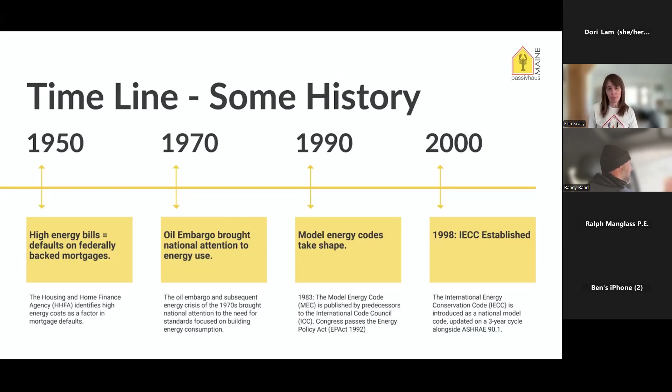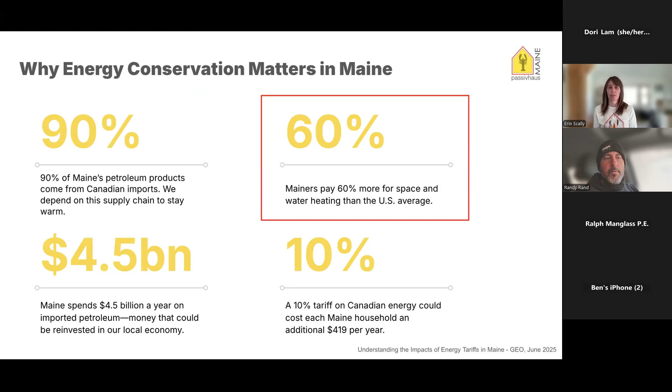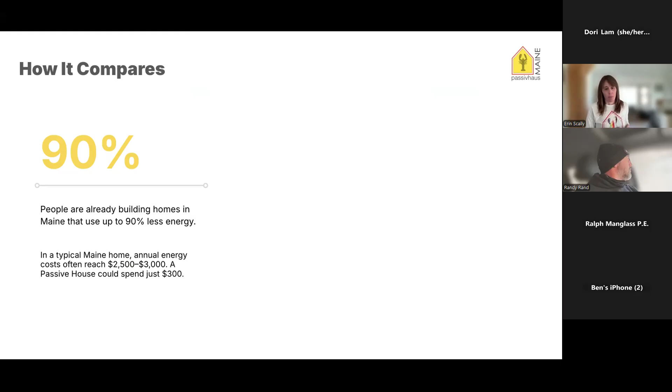Our name is Passive House Maine, though I'm not trying to sell anybody on being a certified passive house builder. To put it into perspective, there are already people in Maine, like Randy and Builders Internet Network, building houses that use 90% less energy than a house built before the 1970s, and about 75% less energy than a home built to the current 2021 standards. Financially, if Mainers on average spend about $3,000 a year on energy, there are builders in Maine already achieving about a $300 annual energy cost.

If we look at how the passive house model compares to the 2021 IECC, we see they're actually starting to overlap, especially with roof insulation—it's R60 in the 2021 IECC, and passive house is pretty close to that. One key difference is air tightness. Passive house focuses on airtight construction with 0.6 air changes per hour, whereas the 2021 requirement is 3 air changes per hour.

When we bring in performance builders to talk during our in-person code trainings, it's really not so different—it's just attention to detail and transitions, which we'll cover later. Cost always comes up. How much more does it cost to build to 2021 IECC compared to 2015? I don't have that data today, but going from 2021 IECC all the way to passive is about a 10% premium on new construction. That percentage gets much less for multifamily or bigger builds—about a 2.4% premium to go from 2021 IECC to fully passive in a large multifamily project.

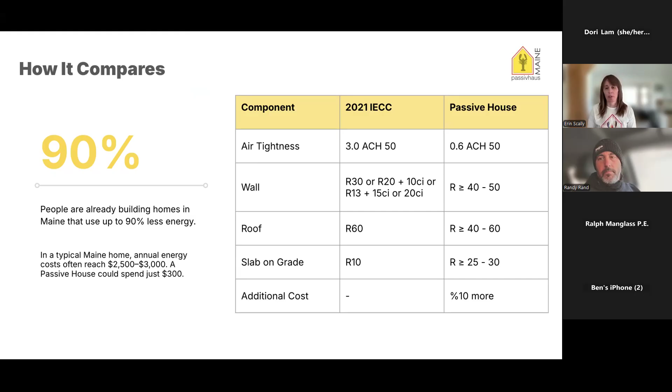We also bring in high performance builders because we already know the trajectory of codes in the US. This is a graph from the Department of Energy showing where we are now—that might be 2021—but by 2024, we'll already have this reduction in energy. By 2030, in the far right corner, the goal is a zero energy building.

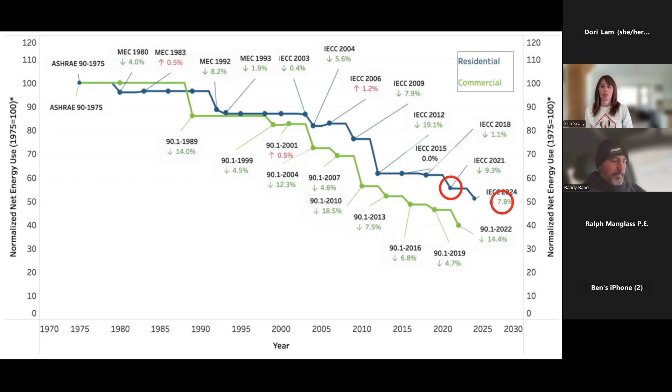So we're here today to talk about meeting Maine's energy code in climate zone 6 and 7. Most of Maine is in climate zone 6, and the county up north is in climate zone 7. Climate zones become important because as we get into code, it starts referencing climate zones.

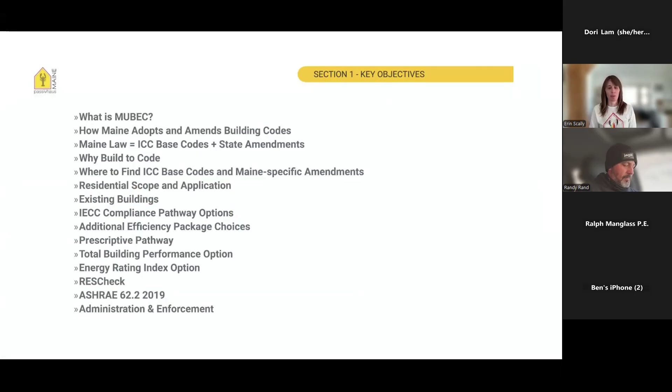So we have a bunch of objectives to cover today. This feels like a test for me. We've been reducing the hours spent on this presentation from an all-day code training, then a 3-hour code training, and now I'm going to try to get through as much as I can in an hour. It's kind of a fun time for me right now.

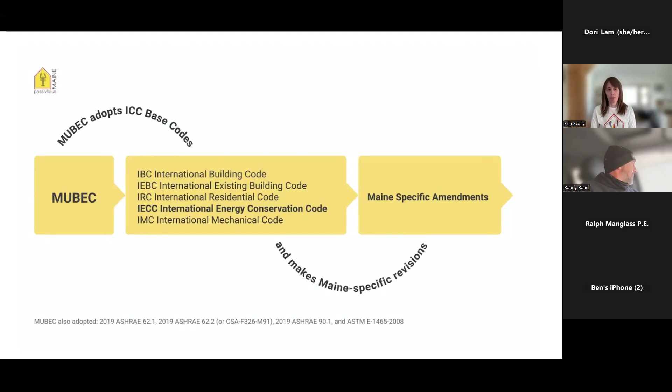All right, let's jump in. What is MUBEC? MUBEC is the Maine Uniform Building and Energy Code. MUBEC adopts our ICC base codes, which includes the 2021 IECC—the Energy Conservation Code—along with the IRC, which is the residential code, and other safety and mechanical codes. Not only do they adopt those base codes, but they also make Maine-specific revisions. So it's our ICC base codes plus our Maine-specific amendments that equal law.

This is actually a sticking point for people understanding who needs to build to code. The answer is that everybody in Maine needs to build to the 2021 IECC standards—MUBEC is law everywhere in Maine. The only difference is that municipalities with 4,000 people or less don't need to hire a code enforcement officer to enforce the codes. Enforcement is always the elephant in the room, but everybody needs to build to the 2021 IECC base codes.

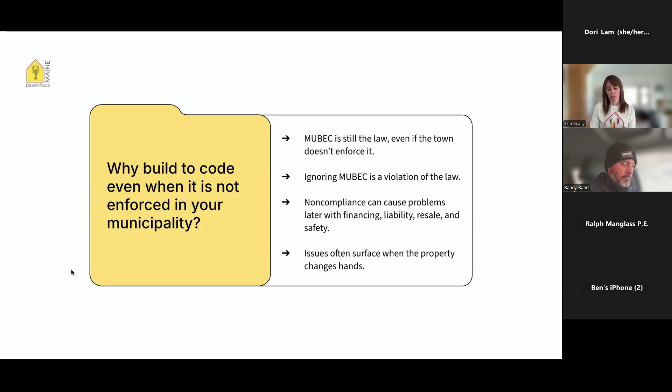So if you're in a municipality with 4,000 or less, why build to code when it's not enforced? Because MUBEC is law—if you're not building to these standards, you're violating the law. Really, non-compliance becomes an issue with resale. Down the road, you'll see the problems when the property changes hands.

So we now know that MUBEC adopts our base codes and then makes Maine-specific amendments. Where do we find these things? The ICC base codes can be accessed for free on the ICC website—I have a QR code here for you. The Maine-specific amendments can currently be found on the Maine State Fire Marshal's website, though I believe that's changing soon. Randy, do you remember the name of the website it's moving to?

I don't know exactly where they'll have it within the website, but I'm sure they'll keep both a link active at the Maine State Fire Marshal's site and redirect people as they look for it.

Just to reiterate, on your left is your 2021 IECC codebook, which is available in online PDF format. It's the IECC base codes plus the Maine specific amendments, found on the State Fire Marshal's website. You download Chapter 6, the International Energy Conservation Code, as a PDF, and cross-reference that with your IECC book.

When we're in person, we like to hold up our code book, which is about 302 pages, and it can feel like a daunting task to understand what the IECC is and how to read it. But when we break it down to the residential provisions, there's only actually 24 pages that this entire presentation is based on. The rest of that book is commercial.

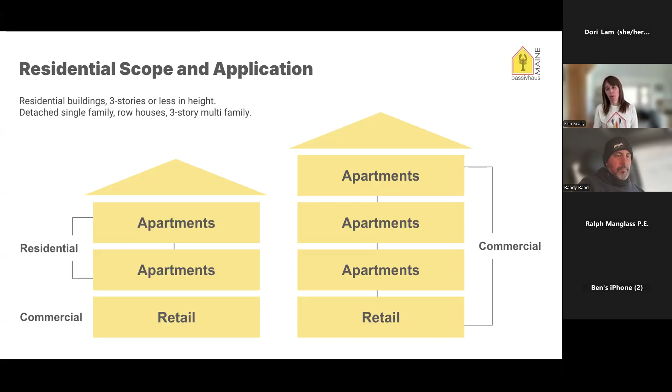It's important to note that as long as your building is 3 stories or less, even if it's mixed use with a couple levels of apartments and one level of retail, the apartments would fall under residential and the retail under commercial. But if you bump that same structure up to 4 stories, with 3 stories of apartments and 1 story of retail, that would all fall under the commercial provisions of the IECC, including the apartments.

I feel like I always talk about this in the context of new construction, but there are guidelines for existing buildings too, covering alterations, repairs, additions, and change of occupancy. Largely, it's only the parts of the building that are changed that must comply with the 2021 IECC.

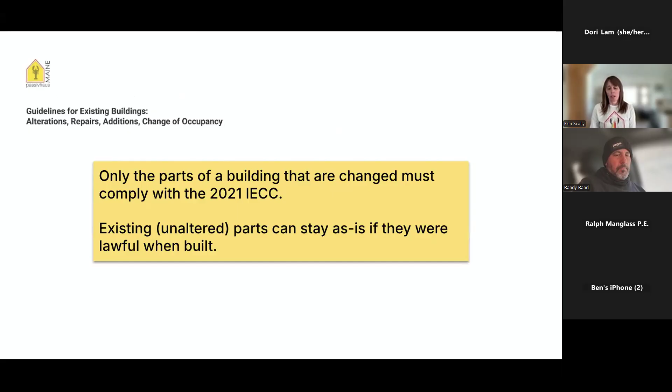To figure out what and how much needs to comply, there's a pretty simple chart you can follow. You decide what your scope of work is. Say you're changing your basement from a previously unconditioned space to a conditioned space—you would actually need that whole space to meet the 2021 IECC. But if you're doing an alteration, only the parts that you change need to be brought up to the current standard.

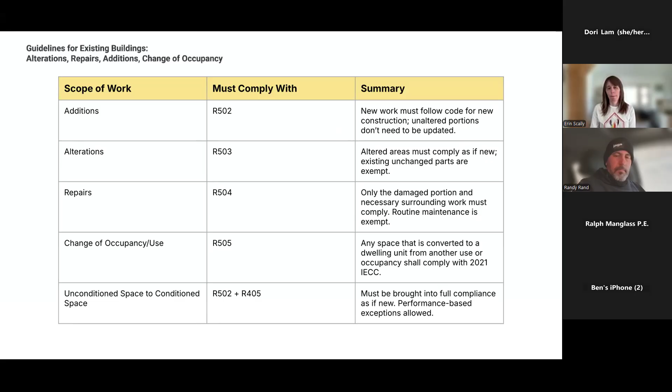Now we're getting into the meat of it. We know where to find what MUBEC adopts and where to find our resources, but now how do we comply with the code? There are essentially 3 compliance options outlined in the IECC, plus MUBEC also adopted compliance pathways like the DOE Zero Energy Ready Homes, PHIUS, or Passive House Certification. If you have any of those, you can actually bypass reading through and following the specifications of the IECC.

But if you are going to just work within the book itself, you have 3 options. You have the prescriptive compliance option, which we're actually going to spend the most time on today because across the board, it's the option most Maine builders pick. There's also a total building performance option and an energy rating index option.

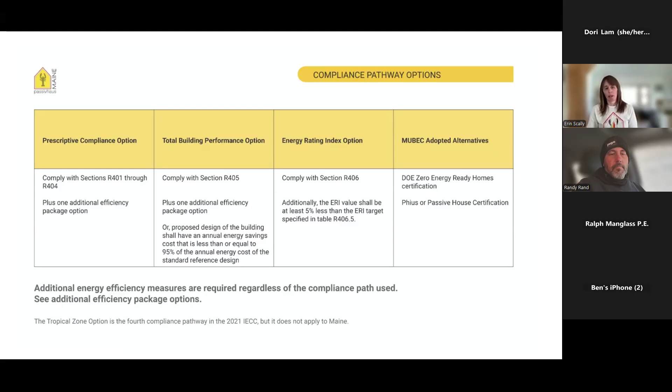So before you even dive into the codes and what insulation values you have to meet, you need to pick how you want to approach your build—which compliance pathway you want to pick. Once you know that, you look at the sections that reference, let's say, the prescriptive compliance option. It will tell you which sections you need to meet, and you can pretty much skip everything else. We're going to stick mostly with the prescriptive compliance option today because it is the one most widely used here in Maine.

But before I move into the prescriptive compliance option, it's important to note that no matter which compliance pathway you choose, you also need to pick one additional energy efficiency measure, regardless of your compliance path.

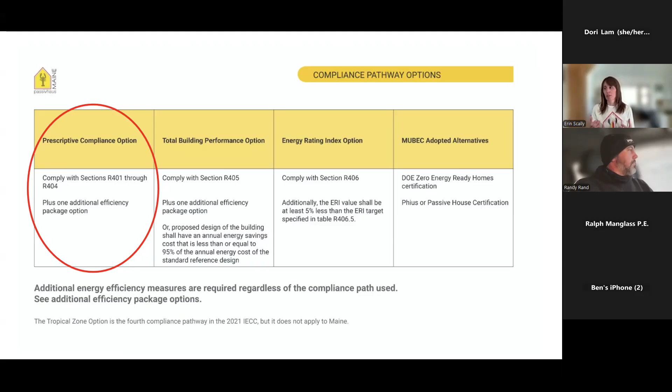So these additional energy efficiency package options are listed in section R408. I have them here written out. Randy, do you know which package option would be easiest to meet, or one that builders are saying they're going to likely use?

Honestly, most of them, I think we wind up hitting and we're not realizing it. If you dig into any of them, the HVAC ones, reducing water heating, a lot of those are starting to be met just with efficiencies in standard equipment that people are meeting. I don't think any of these are really difficult or impossible to overcome.

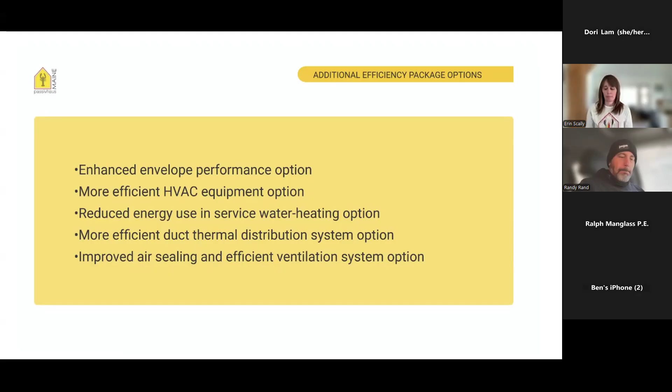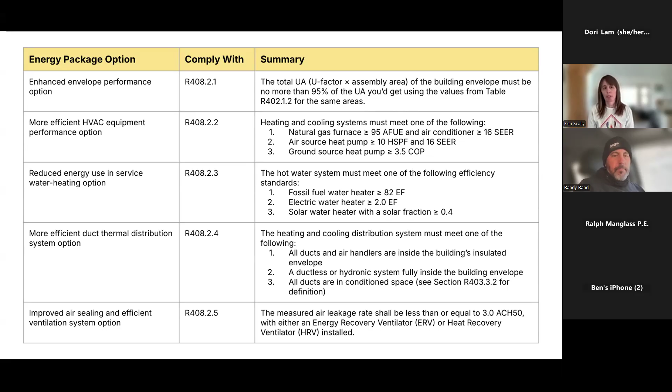This is just a chart on what these energy package options are, what section you can find them under, and what the minimum requirements are. I'll be sending out a PDF after the presentation where some of these resources will be included. So we don't have to go through it step by step, but I want to bring awareness that you have to pick your compliance option, and no matter which compliance option you pick, you have to add an energy package option.

All right, so now we're getting into that first compliance pathway, the prescriptive compliance option. It gets a little bit confusing because we have essentially three compliance pathways we can choose, but within the prescriptive compliance option, you actually have three different ways you can show compliance within that one pathway.

For the most part, builders in Maine are going to choose the minimum R value table pathway. They'll be in prescriptive, look at the chart listed in R402, and meet those minimum R value requirements. Two other ways to show compliance within the prescriptive pathway are by meeting the maximum U factors listed in another table, or meeting the total UA alternative requirements listed elsewhere in the code. So we're going to walk through these three ways to show compliance within the prescriptive option.

The first and most widely used is meeting the minimum R values listed in the table. I feel like this is the pathway that most builders choose. I do want to say upfront that this is the most restrictive pathway within the entire compliance options, because you actually have to meet these requirements per assembly as they are. You have some options within it, like when you see wood frame walls, you can choose how you want to meet those R values, but by and large you just have to hit these R value numbers.

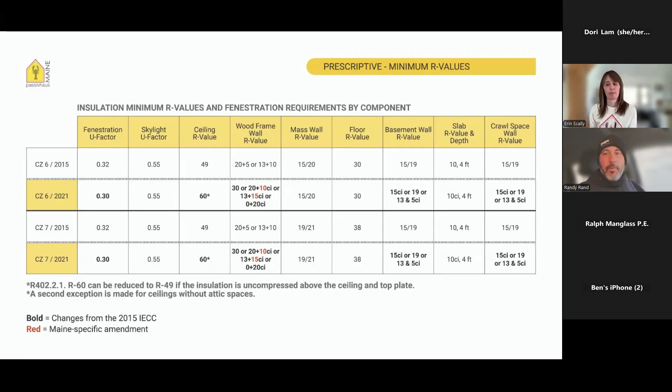All right, so we're still within the prescriptive compliance pathway, but this would be kind of that second way that you can show compliance within the prescriptive option. You would use the maximum assembly U factors, similar to the R value table for the most part. What gets interesting is when you start using U factors, you have a little bit more flexibility built in. When you're using the R value table, you're only getting credit for the R value of that insulation. But when you start to get into U factors, it's actually going to take into account your stud spacing. You're going to get credit for your sheathing, and for your interior and exterior air barriers.

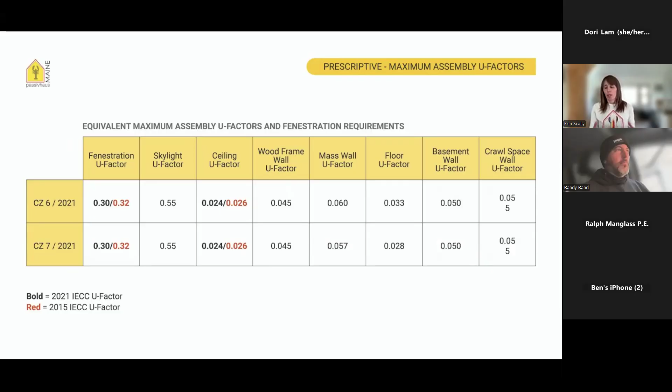So it's taking more of your assembly into account when you use U factors. But what both the R value and U factor tables are getting at is that the IECC wants to be sure it's understood that your building needs to have a very well-defined thermal envelope. When doing what we call the red pencil test, you need to take a section of your building and go around that entire building, defining your thermal envelope without picking up your pencil. In this case, it could look something like this—we're moving around the building, we know exactly what our R values are and what they need to be in every component, and we have to make sure it goes all the way around our building in one continuous attempt.

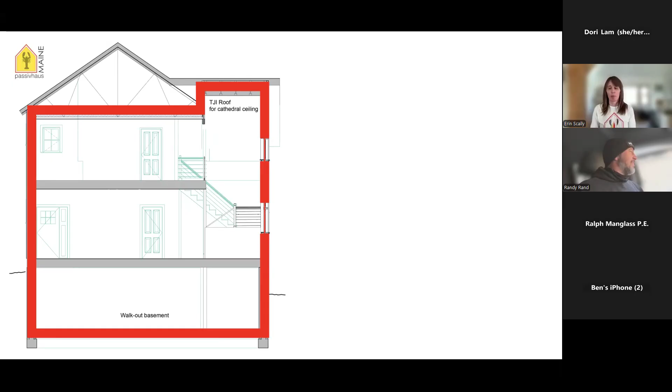The third way to show compliance within that prescriptive pathway is by meeting the total UA alternative. This is where it actually starts getting much more flexible. The total UA is the sum of the U factors, so you take the U factors of your assembly and multiply that by your assembly area.

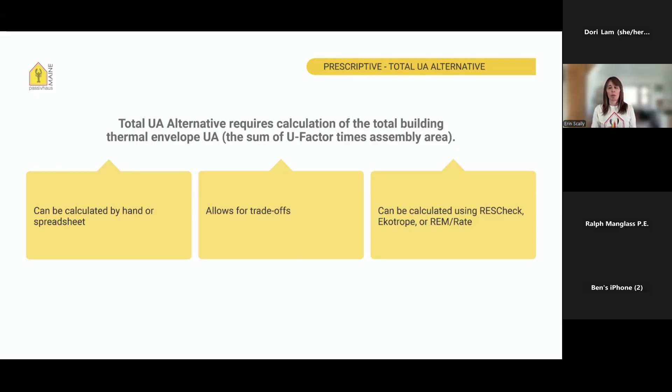This can be calculated by a spreadsheet or by hand, but it's mostly calculated with a free online software called REScheck. This is where we start to see trade-offs. If it feels cumbersome to meet the R60 in the ceiling, or the continuous insulation on a 2x6 stud wall, when you use the total UA alternative, you can start getting credit. So if you boost insulation here, or opt for better performing windows, you might be able to take a reduction elsewhere. Again, ResCheck is the simplest way to show compliance within this total UA alternative.

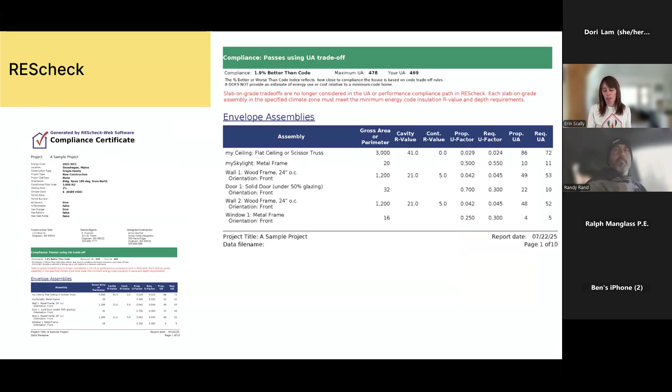Again, it adds trade-off flexibility. But not only that, when you use ResCheck, it gives you a comprehensive evaluation. It prints out a checklist for yourself, a checklist for your code enforcement officer, and it also prints out what's called a permanent energy certificate. These are all requirements of the IECC, and this one software actually does it for you. It's very easy to use. You go in and plug in your U factors and your assembly area, and it spits out a report telling you if you've met or exceeded code, and gives you the percentage better than compliance. For anybody building in Portland, South Portland, or Freeport, those municipalities have adopted the stretch code, and this is the tool you'll use to show your percent better than code, because the stretch code requires that you are 15% better than code.

Randy, is there anything else you want to add about ResCheck other than flexibility and ease for code enforcement?

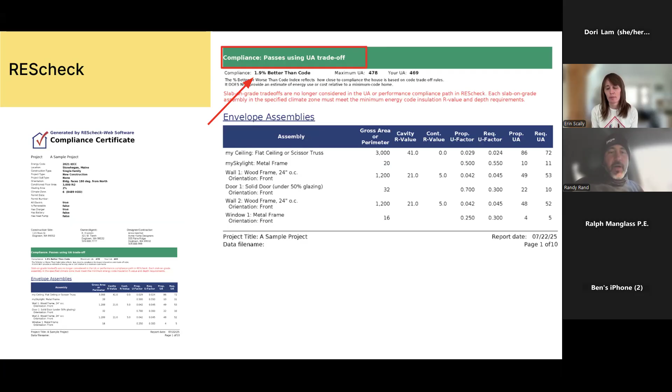No, it is a free software, so it's not something you have to purchase. I recommend that people always give it a try—just download it or open it up and actually go through the exercise of trying it. It's a really simple piece of software, and a lot of municipalities, even if they offer another compliance pathway, are actually asking builders to submit a ResCheck calculation with their building permit. So don't be surprised, depending on your jurisdiction, that they ask for this. It's not overly complicated, so it's a good exercise to try with a current project or your own home, just one evening, give it a try and see how it goes.

So we're jumping out of the prescriptive compliance pathway because we've covered the three options you can use to show compliance within that method. The total building performance option is the second option listed by the IECC where you can show compliance.

This compliance pathway is not widely used here in Maine. I don't know that it's widely used in surrounding states either. This compliance option is when you use very specific energy modeling software to demonstrate that your proposed building uses less energy than a standard reference design. In this pathway, it only looks at your mechanicals—heating, cooling, mechanical ventilation, and service water heating—to show your total building performance. Again, not widely used here. If you have any questions on this particular pathway, I'd be happy to take questions at the end or via email.

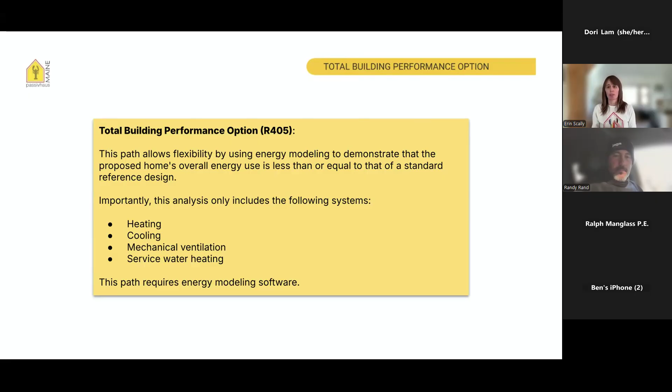The last compliance pathway within the IECC is the energy rating index. I like the idea behind this one—I think Randy has had his opinions when I've said that—because what the ERI does is give you essentially a score of your home and its performance. Zero being the best, high performance and renewable energy, and 100 being the worst. So it places your home's energy score somewhere from 0 to 100.

What I like about it is that it gives you an apples to apples comparison. Say we get to the point where the majority of Maine homes are rated—you'd be able to, when purchasing or selling a home, say, hey, mine is performing this much better than the house next door. I think it's an important direction because then we can start to have energy efficiency built into home sales. It's also a consumer awareness thing—homes are probably the largest purchase we'll make in our lifetime, but we don't get to see that quote-unquote MPG on a window sticker like we do at a car dealership. We can't say how much our energy bills are going to be each month, so I think this is a valuable tool.

It's not used widely here in Maine, I think primarily because Maine might only have two or three third-party raters who can perform this work. So, interesting concept, not used a ton here in Maine.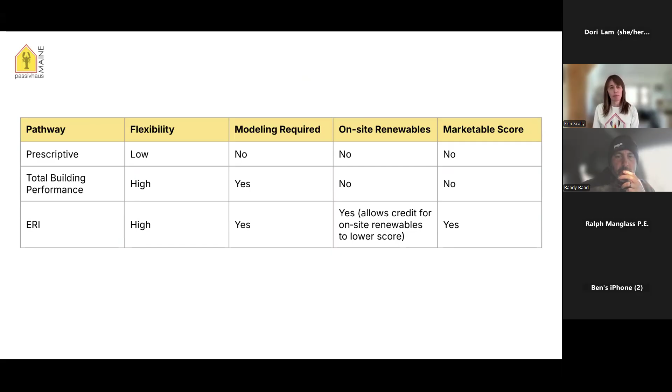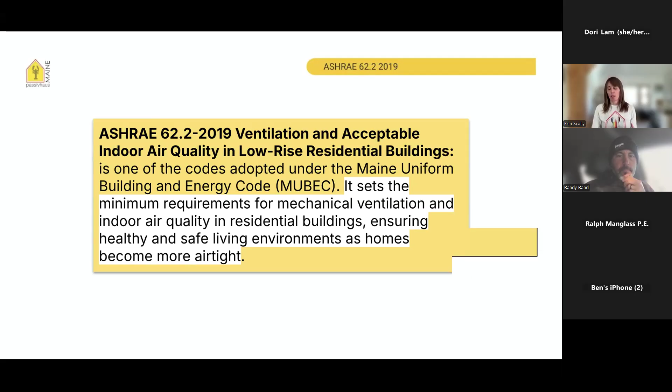Now we're getting into the ventilation part of the IECC. MUBEC has adopted ASHRAE 62.2, the 2019 version. This lists acceptable indoor air quality in our residential buildings and sets minimum requirements for mechanical ventilation. By code, all buildings in Maine must have some form of mechanical ventilation.

When you get into climate zone 7, which if you're up in the county, it's already a requirement that you need to have a balanced ventilation system - an ERV, energy recovery ventilation, or an HRV, heat recovery ventilation. So just to reiterate, all homes need some sort of mechanical ventilation, and in climate zone 7, it needs to be a balanced ventilation system. We can talk briefly about the differences.

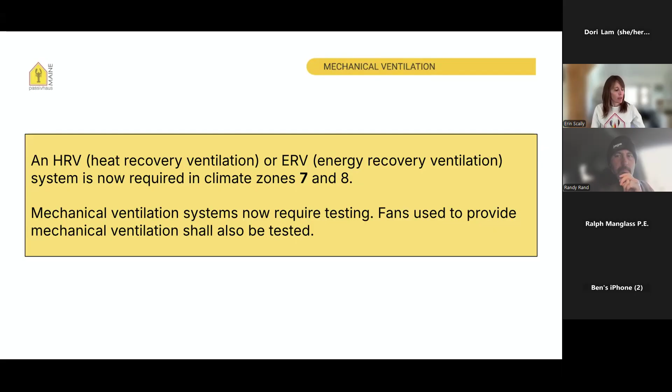By and large, most people are installing exhaust only ventilation systems. This would look like a bath fan or a hood range that is continuously running, meaning it's on 24/7. The difference is if you have it in the bathroom, there's a boost mode you can kick on so it draws more air out of the house for those times when you're in the shower.

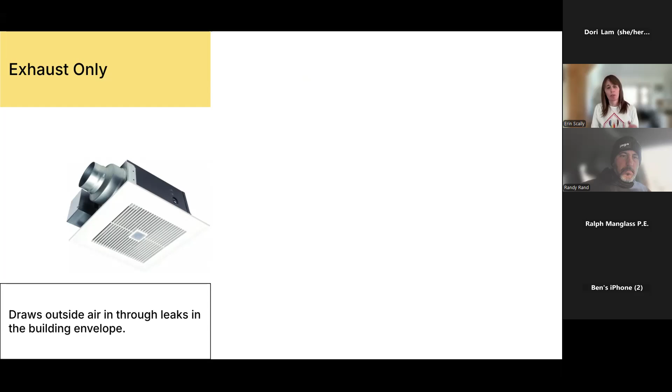So when we have exhaust only ventilation, what's happening is it's depressurizing our houses. We're sucking air out through our range hood or our vent in the bathroom, and it's pulling air in from all of our unintended leaks in our assembly, typically around the sill plate. It's coming up over cobwebs and rodent stuff and things that are just not very - it's not fresh air. We're just replacing air by sucking it in through unintended leaks.

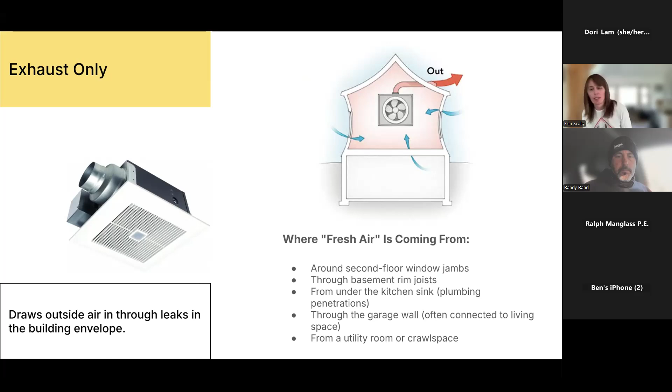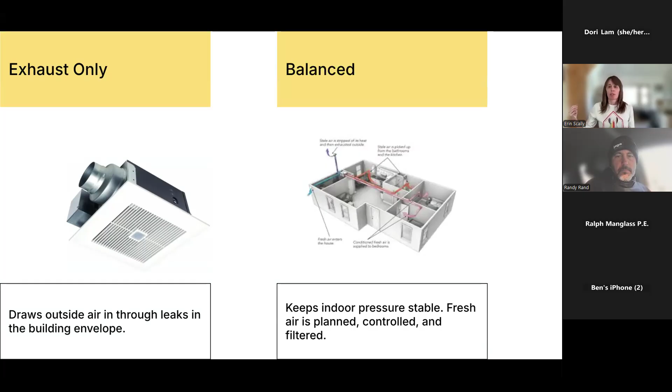When we talk about balanced ventilation, the key difference is that it keeps indoor pressure stabilized. We have a fresh air intake that's being filtered, and the stale air inside our house is being exhausted to the outside. These systems - an ERV, a ducted ERV, or an HRV - the incoming air is going to cross pass with the outgoing air, and it's going to precondition it.

So if we're in a Maine home in the winter, instead of just having an exhaust only bath fan which depressurizes the house and brings in all the cold air from outside, this system is going to precondition the air. So the air coming in is going to cross path and be preconditioned with the outgoing air - it's almost a 90%, 95% heat recovery. So the air you're bringing in is filtered, preconditioned, and the stale air is exhausted.

Randy, I kind of went through that pretty fast. Is there something else you want to add? Sorry to put you on the spot.

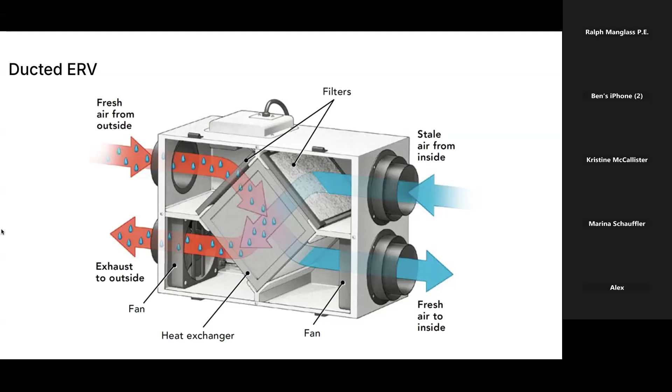No, I think you covered it well. Just the idea that one of the two methods is required by code - continuously running exhaust only, or balanced ventilation with an ERV or HRV. Okay.

So we have ducted systems, and a large part of the work being done in Maine is for retrofits, where we can do ductless ventilation systems, which do exactly the same thing as that ducted system I just referenced. But these ones work in pairs, and they just go through one wall, and then the other one is placed strategically so you have some cross ventilation. Both the ductless and the ducted recover the heat and precondition the air coming in.

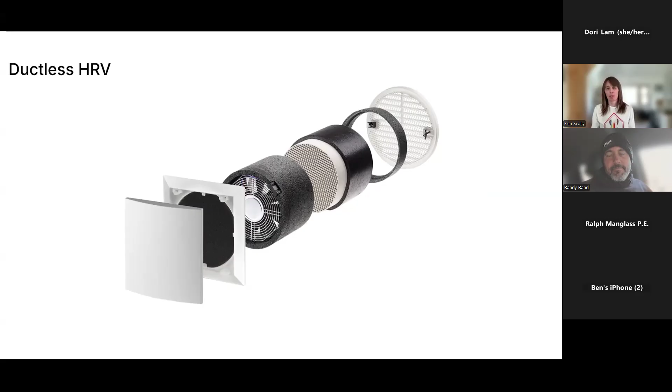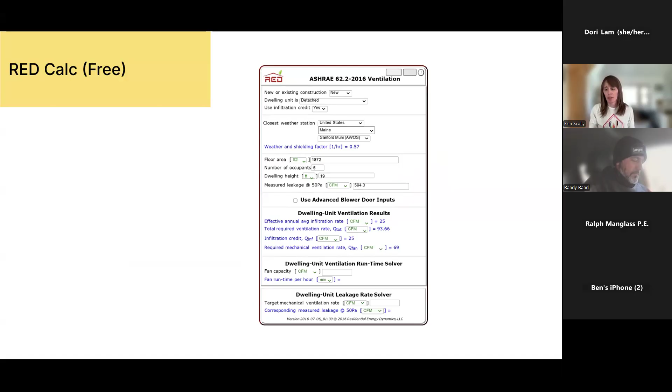So when we talk about ventilation, there's another free online software called RedCalc. RedCalc will make quick calculations on ventilation requirements, so you don't have to just come up with what your needs are by yourself in a bubble. You can use this free online tool. It's quick and easy, just like ResCheck.

All right, so we're going to get into building air leakage and testing. This is another big one that when we're in person doing our all-day code training classes, we actually bring in an energy auditor who runs a mock blower door test. Blower door tests are how we measure how leaky our homes or buildings are. Typically, it'll depressurize the space, and they'll be able to do calculations and tell us what our air changes per hour are.

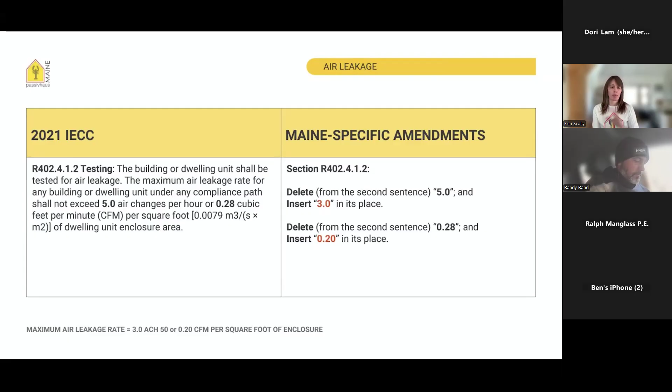So in 2021 IECC, the air leakage rate is 3.0, so you can have 3.0 air changes per hour. Again, I want to highlight that it's important to cross-reference your Maine specific amendments with your 2021 IECC book or PDF, because in the book, if you just read air leakage and testing, the first paragraph says it shall not exceed 5.0 air changes per hour. This was massively confusing when the 2021 IECC came out because people were just stopping at that first paragraph. But a few paragraphs down, it says except for in climate zones 3 through 8, it's 3 air changes per hour. So Maine went ahead and made sure that 5 is removed entirely and that 3 is inserted in its place.

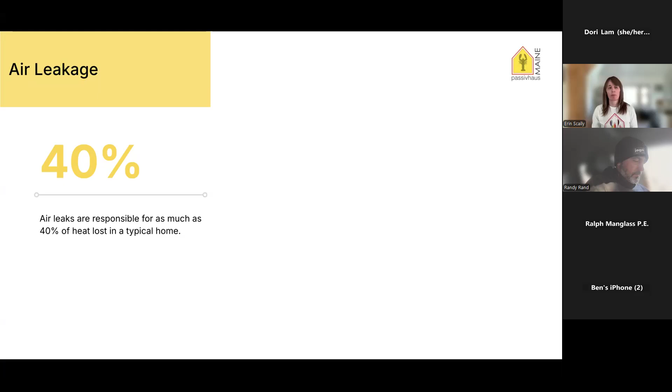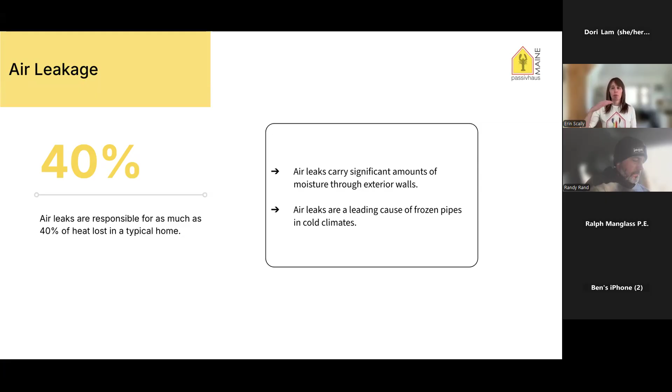So why is air leakage important? Air leakage is responsible for up to as much as 40% of heat loss in a typical home. Air leaks can carry significant amounts of moisture through exterior walls. And air leaks are actually the leading cause of frozen pipes in cold climates. I think people tend to think it's a lack of insulation, but it's actually that cold air moving over your pipes that's freezing them.

But if we take a look at this point that air leaks carry a significant amount of moisture through exterior walls, we can ask ourselves, well, how much moisture, and do we really need to be concerned about this? So in a typical Maine winter, you have an inside temperature of 70 degrees and maybe an outside temperature of 21 degrees. Our cavity insulation, the R30 in there, is doing such a great job resisting that flow of heat that our sheathing is no longer being warmed up. If you think of pre-1970 homes, there was no or very little insulation, and we were spending money on essentially heating the entire assembly, including the exterior sheathing. But now that we have really good insulation products and we're insulating very well, the inside face of our sheathing, where it says 21 degrees, is not being heated.

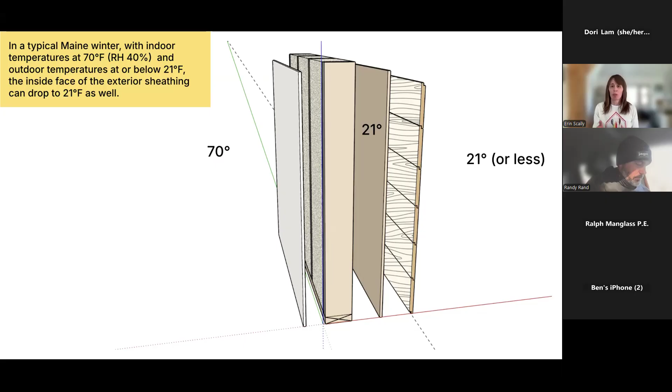It's very cold. So as air moves through, warm humid air from the inside moves through our assembly, it's cooling down, and its capacity to hold that relative humidity, that sweet spot of 40 to 50% relative humidity, is reduced to the point of 100% condensation. So just moving through your assembly, it hits that inside face of your sheathing and results in constant wetting of that material.

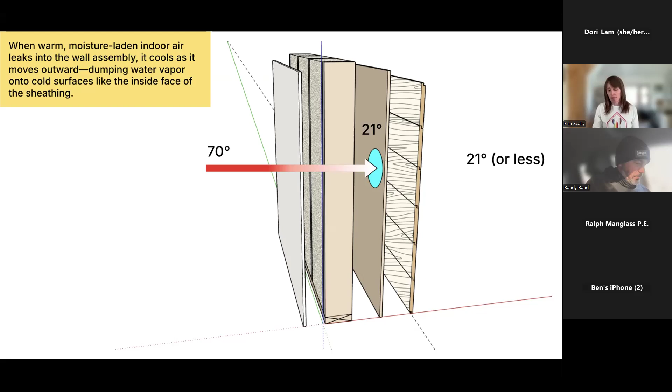But if we want to talk about how much water passes through, if we had a 1 inch by 1 inch hole in our drywall, for reference, all our light switches and outlets are bigger than 1 inch by 1 inch. In a typical Maine winter, about 30 quarts of water could pass through that 1 inch by 1 inch hole. That's why air tightness is extremely important when we talk about buildings and building durability.

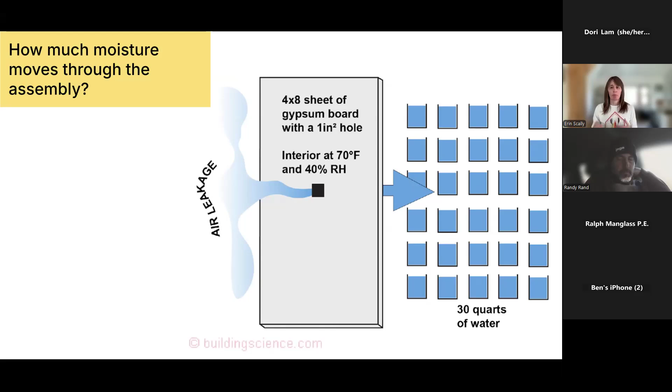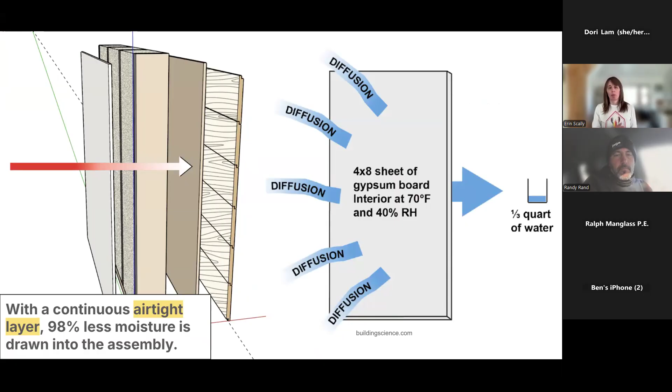That is why in the passive model, the air changes are 0.6 air changes per hour, because we want to stop that air from moving through our assembly. So if we had that continuous airtight layer and we're hitting passive house standards of 0.6, 98% less water travels through the assembly. It's only vapor diffusion that is getting through your assembly, which equals about a third quart of water compared to that 30 quarts of water with a 1 inch by 1 inch hole.

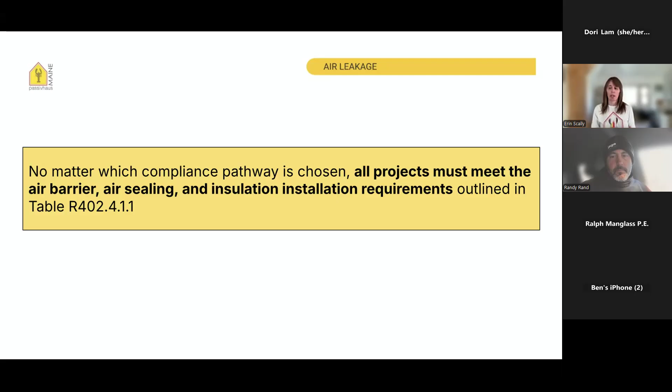So we know that our air changes are 3.0 air changes per hour allowable by code. And it's also written in the code that all projects must meet air sealing and insulation requirements listed in the table that I'm going to go through a little bit next. So this would be that table that I just referenced. We're not going to read word for word. We're actually coming close to time here, but I am going to call out just a few of these key things to drive home some points.

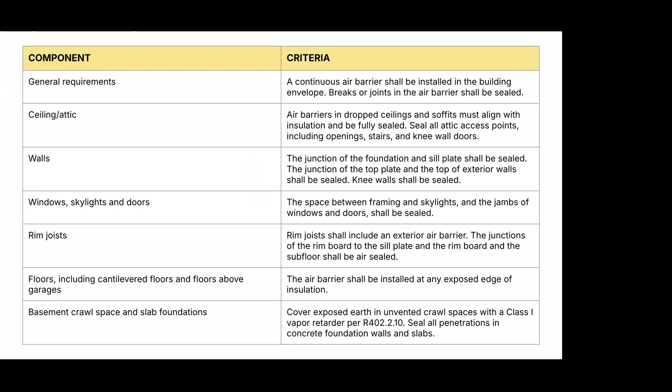So if we take that first component and general requirement that a continuous air barrier shall be installed in the building envelope, breaks or joints in the air barrier shall be sealed. Just like the thermal envelope, it needs to be continuous.

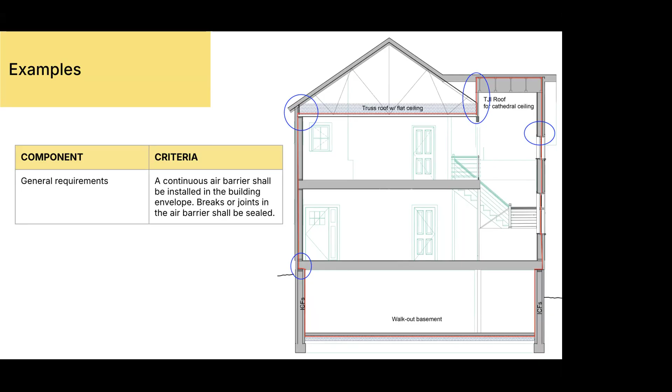You need to be able to take a section of your house or building and draw a plan for your air barrier all the way around your assembly without picking up your pencil. It gets a little challenging, but we can start reading deeper into the code and start calling out these spaces that need to be air sealed or taped.

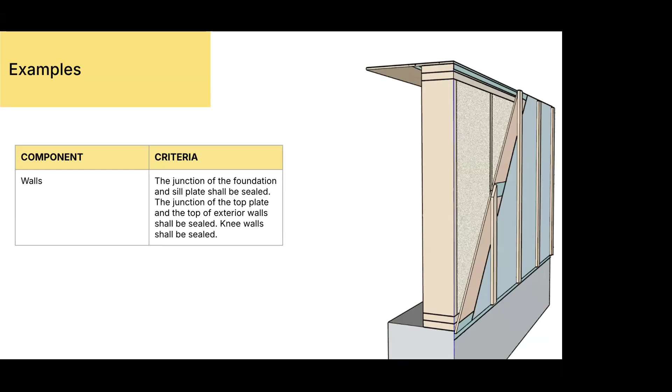So if this is a 2-bay stud wall assembly on a foundation, and I'm using my exterior sheathing, which would be CDX or better, as my air barrier, I'm going to make sure that I tape the base joint, the foundation to the sheathing. I'm going to make sure that the sheathing is taped to the transition up over the top plate.

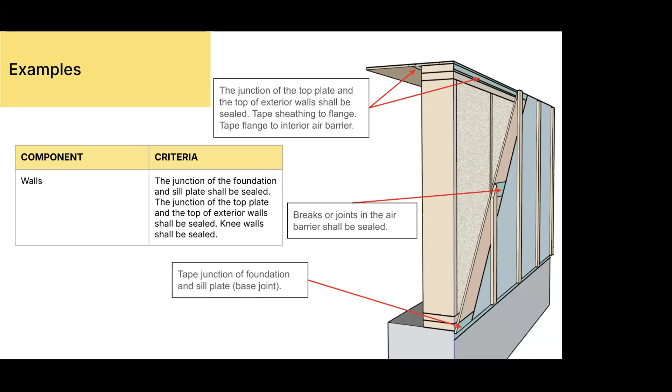I'm going to tape all seams in the plywood sheathing to continue to create that continuous air barrier around my assembly. This is just another shot of making that transition from the sheathing up over the top plate. It's something that has to be planned ahead of time.

In this scenario, I'm envisioning that I'm ripping down a piece of zip and using it as my air barrier on top of my top plates. I'm going to leave a little extra than the width of my studs so that I can continue my air barrier on the inside under the top of my truss system.

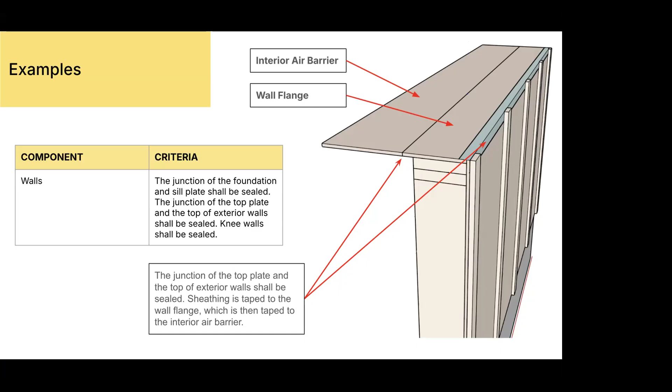This all took pre-planning to make sure he knew where his transition points were going to be and what materials he was going to use. He was going from an exterior self-adhesive WRB to an interior air barrier vapor barrier membrane.

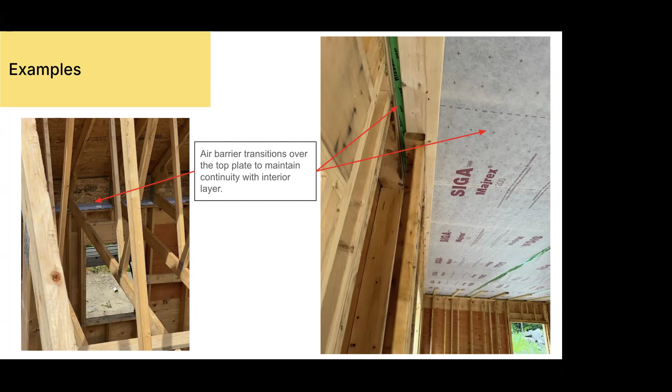We can also say that we know and understand these common air leakage points. So if we were doing a blower door test, we can know the big problem areas. A lot of times it's your sill plate that hasn't been caulked and air sealed, or your rim joist. When I think about my own home, I have all these can lights, 6-inch holes all throughout my ceiling.

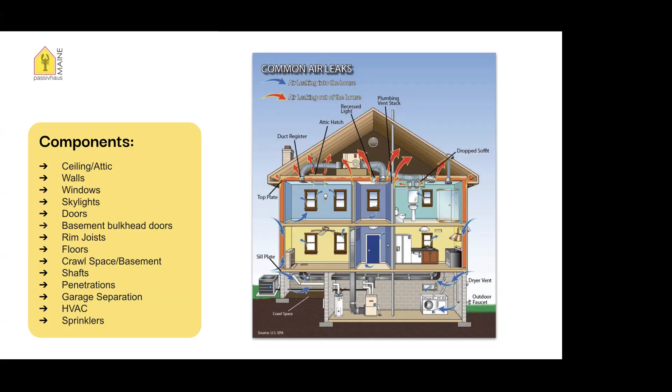So the mechanical code and the ICC want us to do the blower door test anytime after all penetrations of the building thermal envelope have been sealed.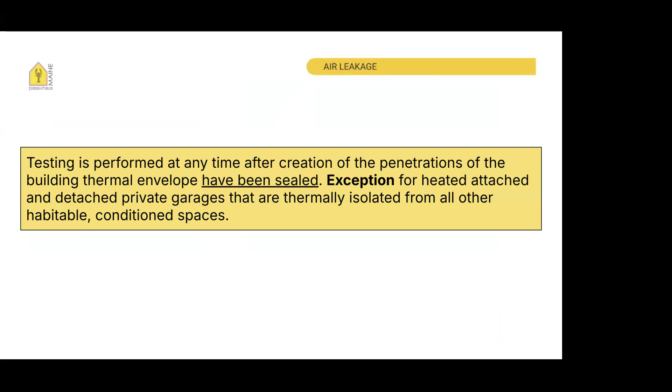I think in our in-person classes, we like to make the argument that you should consider a pretest. You would do that when all windows and doors are installed and most mechanical, electrical, and plumbing systems have been installed, and the air barrier components are visible and accessible, accessible being the key word there, so that if someone was setting up a blower door test, you could walk around. It's a really great learning point where you can see where your air leakage is coming from and address it before your insulation is installed.

In my own home, particularly before the blown-in cellulose, would have been a great time for me to do a blower door test, because then I could have gone in and air sealed along where my top plates meet my drywall and any other penetrations through my ceiling.

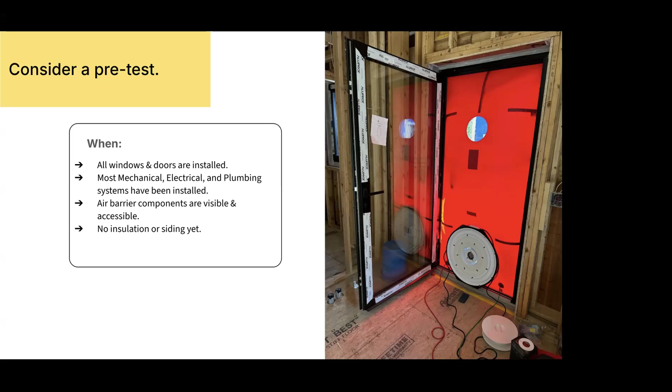I'll add something really quickly there, mainly because a lot of people are utilizing the drywall as the air tightness layer. One important thing: if you're relying on your drywall, you can't do your blower door test until after that point. So as soon as you can get that up and have a test done, do not insulate your attic.

That's mostly the majority of the spots where you'll find your additional air leaks, and it'll be way easier to help you meet that 3 air changes per hour if you have access to that attic space and if you're relying on your drywall as an air barrier. The why behind the pretest is to allow us time to correct air sealing issues.

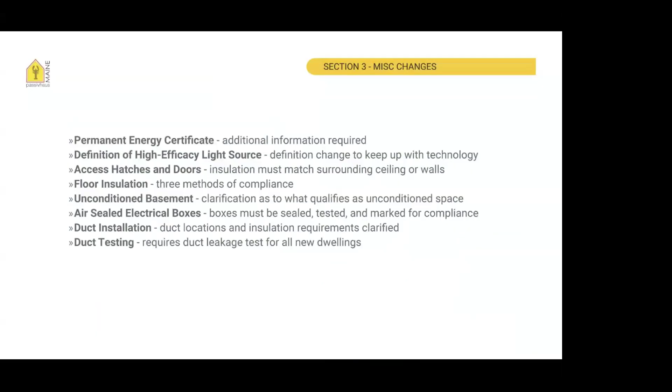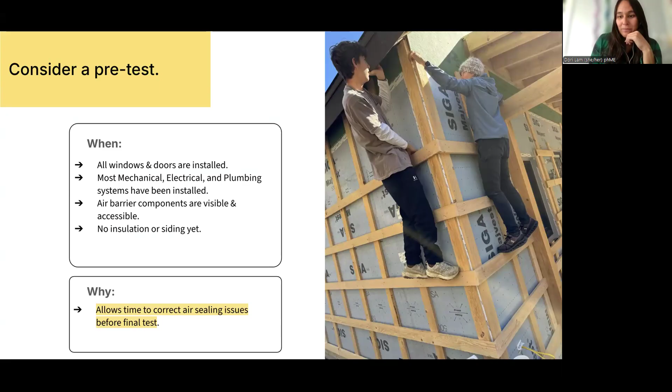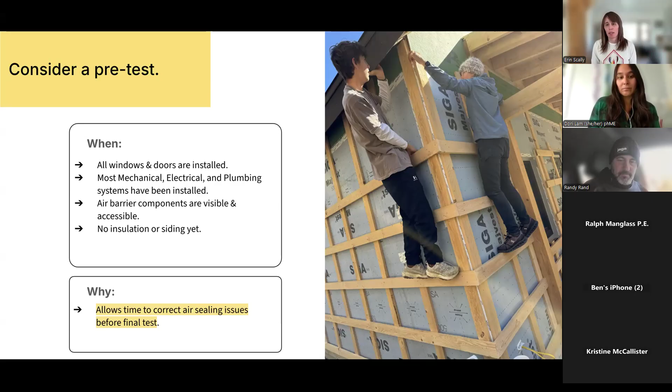Okay, I think here is actually a really good point to stop. Dori, I don't know if we've had any questions in the chat. You still there? Okay, no, we haven't. Well, we have another 5 minutes. I'm more than happy to take questions, or I can try to power through the remaining miscellaneous 2021 updates. Randy, you think we should just blast through these real quick?

When we look at the key changes between the 2015 and 2021 IECC, we have additional miscellaneous updates that don't fit into compliance pathways or air sealing. Some of them are listed here.

Every building in Maine has to have a permanent energy certificate on site in a permanent location. I believe this was also part of 2015, but there are now more requirements. This certificate would be printed out if you use REScheck.

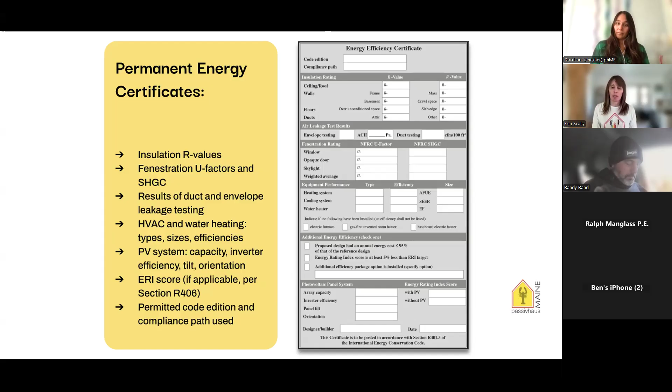Lighting controls is another update. All permanent light fixtures must use a dimmer, occupancy sensor, or built-in control. There are exceptions to this. This is all just to conserve energy.

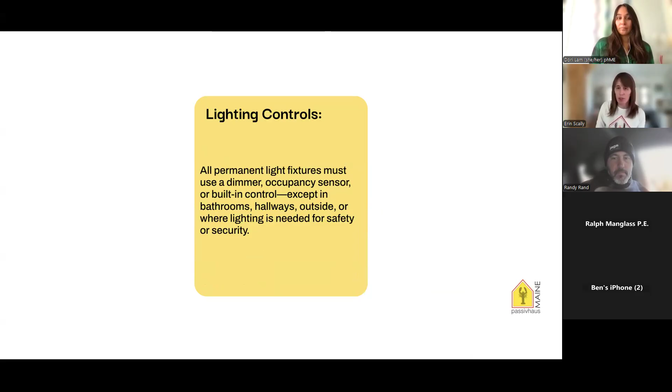This is a big one that we talk about extensively in our trainings: access hatches and doors to unconditioned spaces need to be insulated to the R value of the surrounding area. So when I think about my home, I have an uninsulated hatch, and technically it should be insulated to at least R49, which would be the surrounding area.

If you are using your drywall as your air barrier, you now need air sealed electrical boxes. This just makes your air barrier remain continuous, because a regular electrical box allows air to pass freely through it. But if you had your air barrier on the exterior of your assembly, or even in the middle of your assembly, you don't need air sealed electrical boxes.

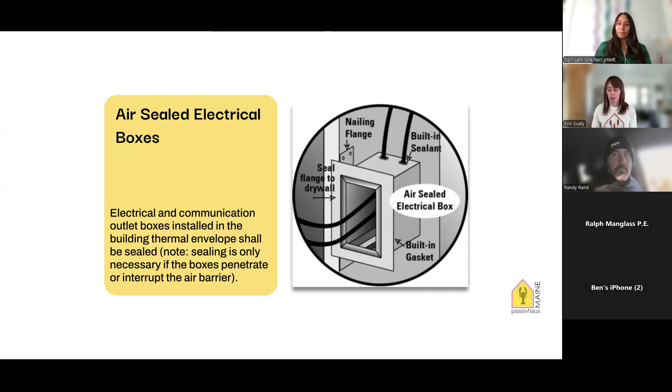Randy, do you want to talk about mechanical system piping insulation? Yeah, I can hit on it. The main point here is to be sure our trade partners are noting there are requirements outside their standard codes. Electricians follow the National Electrical Code, but the energy code and our building code have additional electrical requirements. Same thing with mechanical and plumbers. There's more requirements on insulation for our plumbing systems, particularly hot water piping insulation, and any mechanical or heating ducts we're running have additional insulation requirements and rules on where they can and can't be located. So make sure your trade partners are aware there are additional requirements beyond their code that we have to meet.

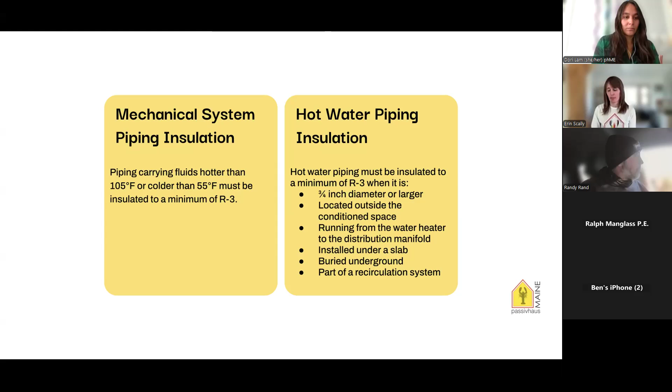Thanks, Randy. Adopted the stretch code—there are additional requirements, and you have to exceed the total UA alternative by at least 15% over a code compliant project. You can really only show compliance with this by using ResCheck. That tool, again, is handy and free. And if you have a project that does not use fossil fuels, you just have to exceed that by 10%.

I am going to give us all a pat on the back—we made it through a ton of content in exactly an hour, so yay.